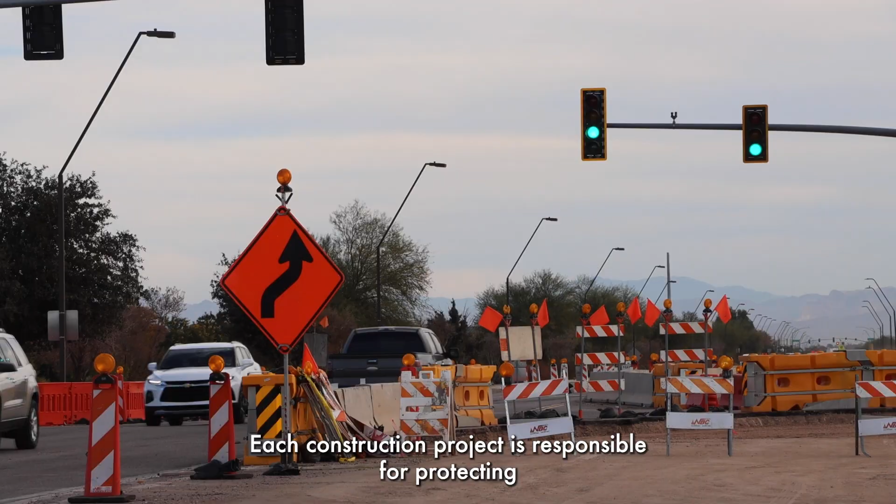Dave Lipinski back with you to talk about some of the traffic restrictions and construction throughout town. As you know, we are a young, growing town. We still have room to almost double in size, and with that comes new development and new construction. Each construction project is responsible for protecting both the construction workers and the traveling public so no one gets hurt.

That's why you see construction barricades all over the place currently. The barricading plans are submitted by the contractors and reviewed by the Public Works Department before they are put in place. My name is Mohammed Yusuf, Public Works Director for the town of Queen Creek. I'm here to talk about traffic control.

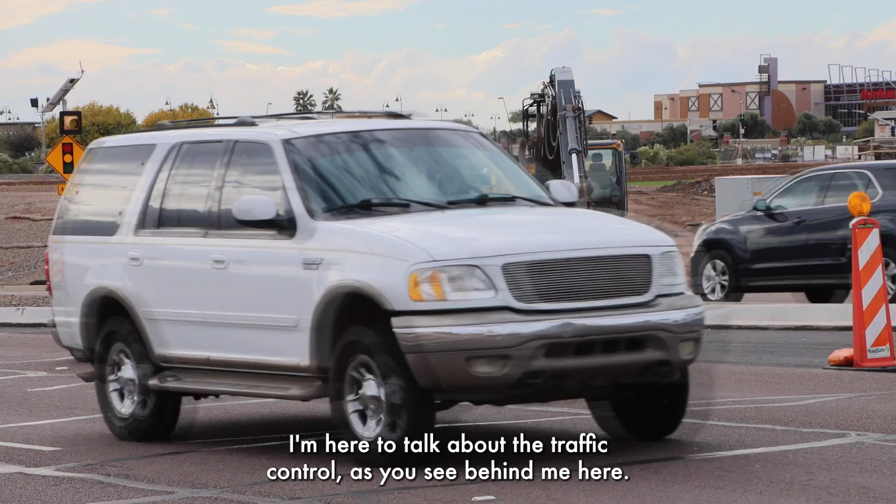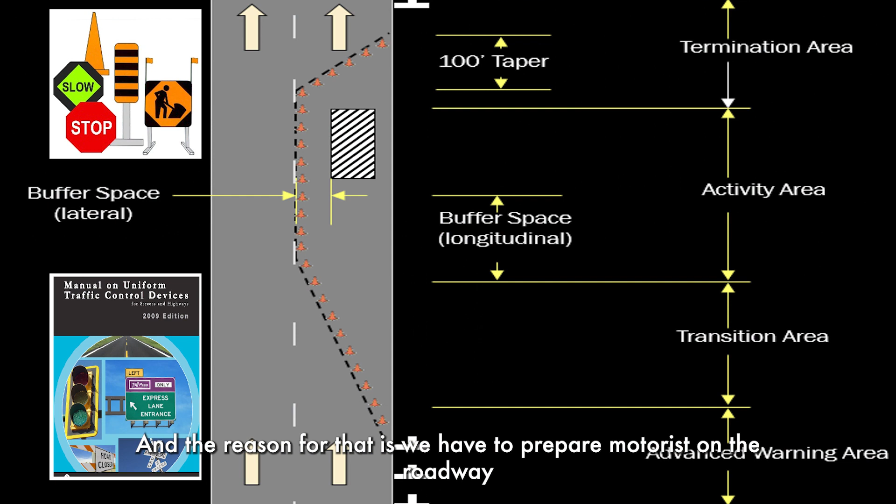As you see behind me here, there is multiple traffic control in town. The reason we have traffic control is basically to protect the motorist and protect the worker working in the work zone. Sometimes you see the work zone is so small, but the traffic control is so large. The reason for that is we have to prepare motorists on the roadway that you have to merge lane or that the lane is closed.

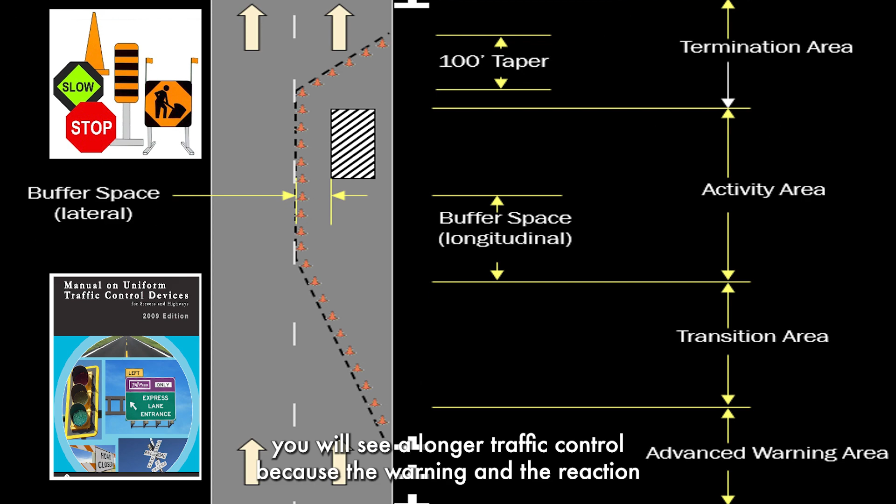If the speed limit is 45 miles per hour, you will see a longer traffic control, because the warning and the reaction time for the driver will take longer with higher speed. Most of the traffic control that you see in town is actually not a town-owned project. It's private development, or a utility service requesting the right-of-way to do their utility business. We have to review and approve all of those traffic control requests.

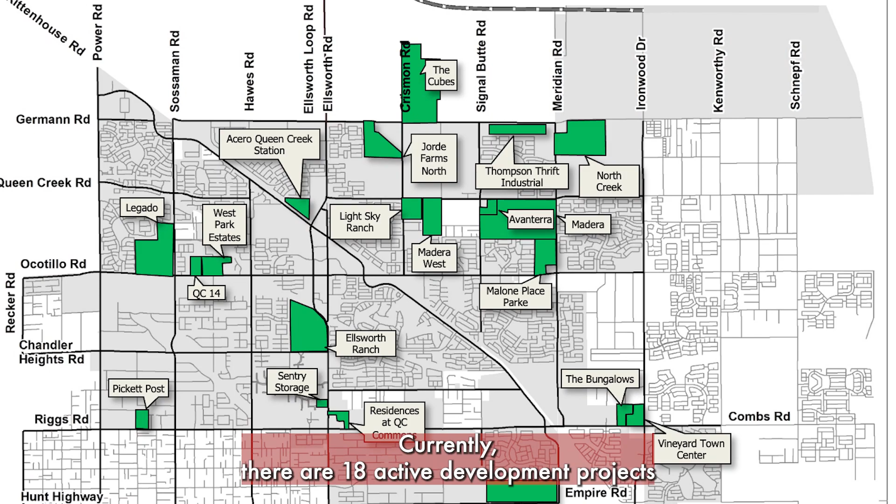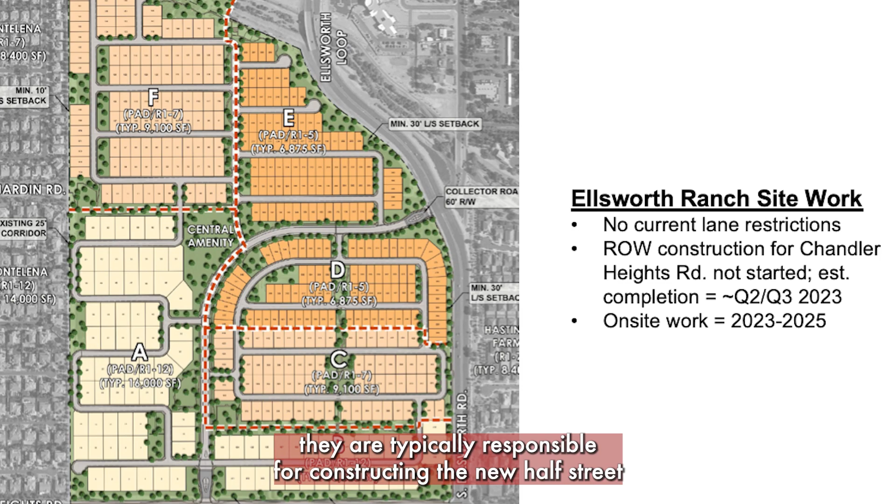Hi, my name is Brett Birmingham and I'm the Development Services Director for the town of Queen Creek. Currently, there are 18 active development projects. As part of the development process, these projects will have some impacts on our roadway system. When a new development is adjacent to a town roadway, they are typically responsible for constructing the new half street of roadway improvements that are needed along the frontage of the property.

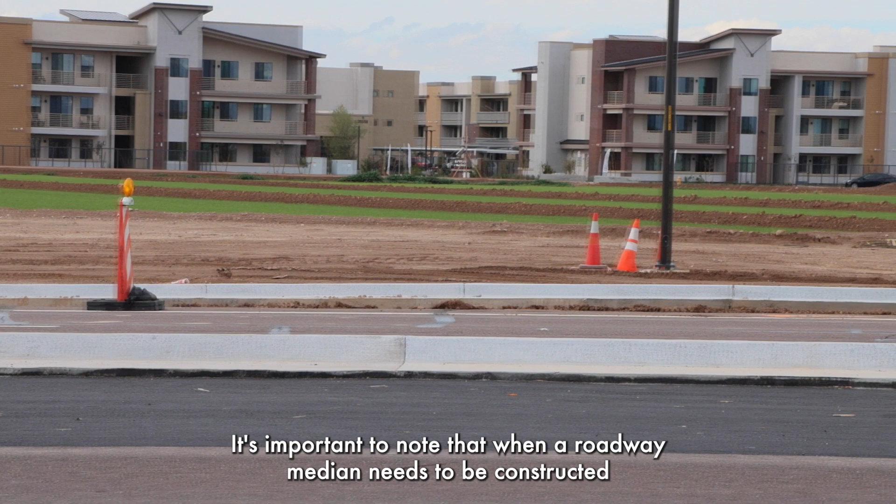It's important to note that when a roadway median needs to be constructed, or when the edge of a roadway needs to be constructed, the town needs to allow a temporary lane closure to allow for this work to be completed as soon as possible.

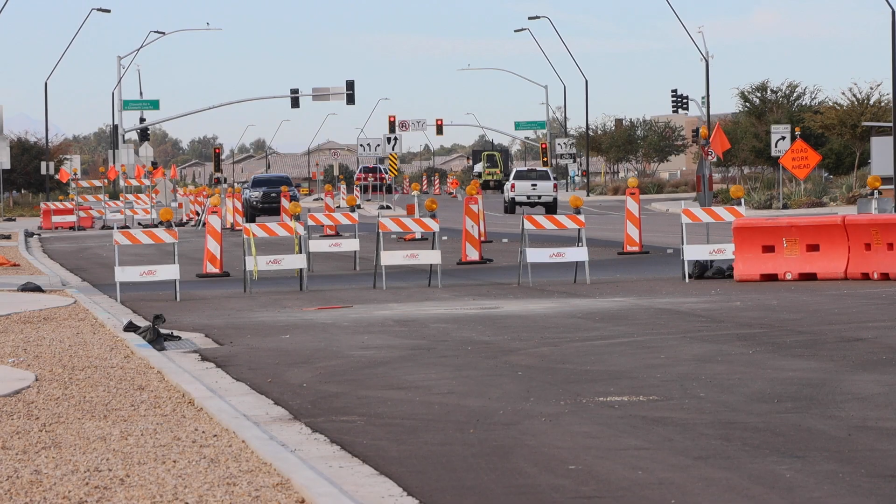Our engineering team is also working with contractors to minimize the impacts to the public and to minimize restrictions where possible. When we review and approve a traffic control plan, we try to work off peak hour. We are trying to avoid the morning peak hour and the evening peak hour, and we allow the contractor to work from 8:30 or 9 o'clock to 2:30 p.m., so that way they avoid the rush hour as much as we can.

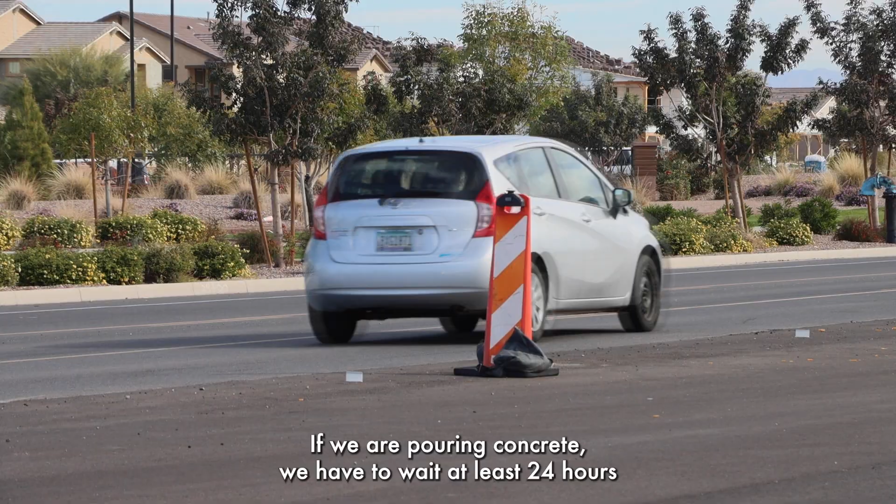But some work requires 24 hours, just because of the nature of the work or the activity of the construction for this project. Sometimes you see a traffic control like that and no workers behind it, but the reason for that is there is cure time. If we're pouring concrete, we have to wait at least 24 hours before we put traffic back on it.

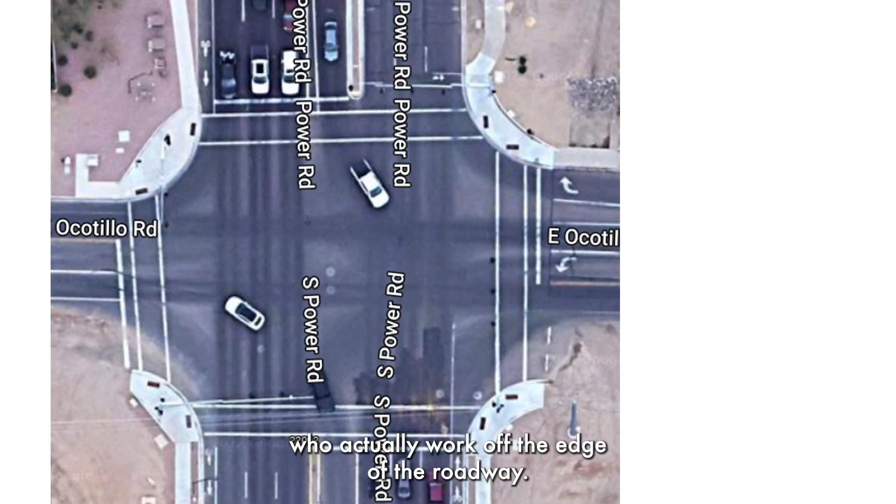The appearance of work not getting done sometimes is misleading, as a contractor may be working at night. They may be working with subcontractors who actually work off the edge of the roadway. In addition, these projects are not completely controlled by the town. You do see the roadway on the surface, however, there are many utilities underground and many different utility providers within the roadway right-of-way that we have to coordinate with, construct and coordinate the construction of their facilities with.

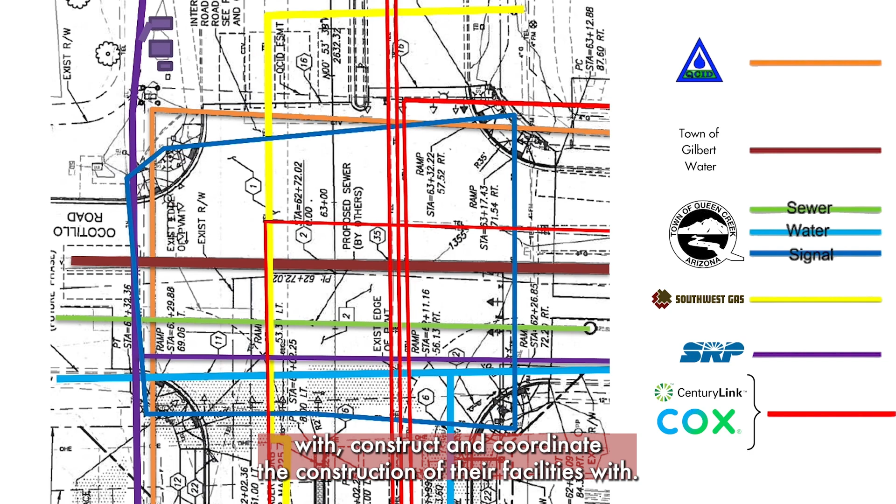Anything that we can do to keep the road safe, the motorist safe, and the worker safe, we will do it. Traffic control definitely is part of road safety, and it's mandatory. There is a national standard that we follow when we review a traffic control plan.

As a reminder, with the opening of the extension of the State Route 24 and our continued push to open the north-south corridors, we now have Ironwood, Meridian, and soon to have Signal Butte. The town is working to improve transportation throughout the community.